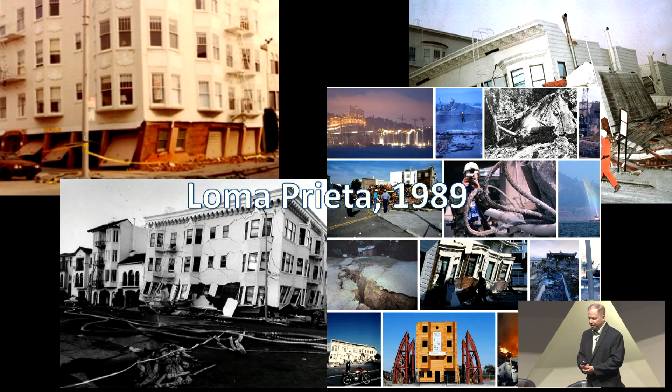So in 1989, while the World Series was underway at Candlestick Park, and many of you remember that if you're over the age of 40 probably, an earthquake struck named for Loma Prieta Peak in the Santa Cruz Mountains where the epicenter was. It collapsed the top level of a freeway, and I think many of us remember that was when cell phones were actually in cars, and people were calling to be rescued from the wreckage. But it also destroyed many, many soft-story wood frame buildings and brought to light that crisis.

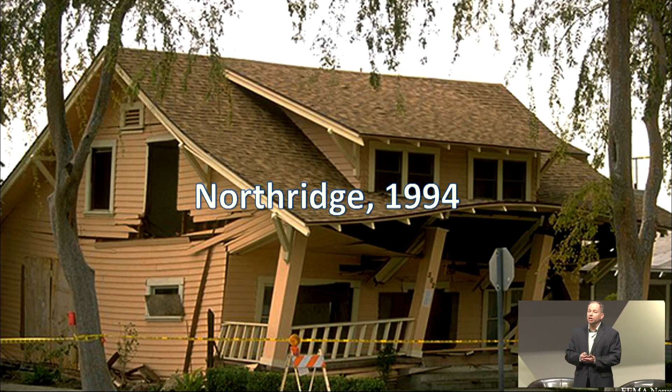5 years later, a blind thrust fault about 450 miles away in Southern California produced the devastating Northridge earthquake with obvious widespread damage. But there was also damage that wasn't quite as evident. And so born were two major research efforts, the SAC Steel Project for steel frame buildings and the CUREE-Caltech wood frame project.

So as a direct result of the Northridge earthquake, the CUREE-Caltech project took a really long and hard and honest look at the deficiencies in wood frame construction in the US. Historically, we thought it performed very well, and it did, relatively speaking, because it's light, and so it doesn't generate a lot of forces. But many, many key recommendations came out of that.

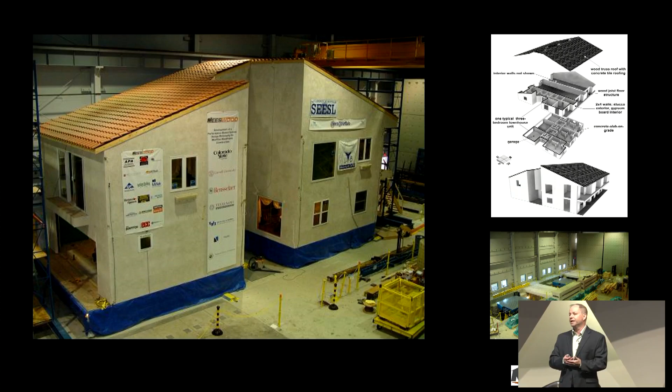So following the smaller groundbreaking tests as part of the CUREE-Caltech project, and some of you were probably part of those, one of the index buildings that was designed as part of that effort was then tested. It was the first major test that used both shake tables at the State University of New York at Buffalo NEES laboratory. That particular test was led by co-PI Andre Filiatrault, who many of you know.

So the E-Defense Laboratory in Miki City, Japan, was built about the same time as the NEES network. It was completed in 2004, and it was the Japanese government's direct response to the Kobe earthquake that occurred almost to the day 1 year after the Northridge earthquake. The Japanese government felt that the level of damage and the number of deaths for a country with such stringent seismic building codes was unacceptable. And so this facility was built.

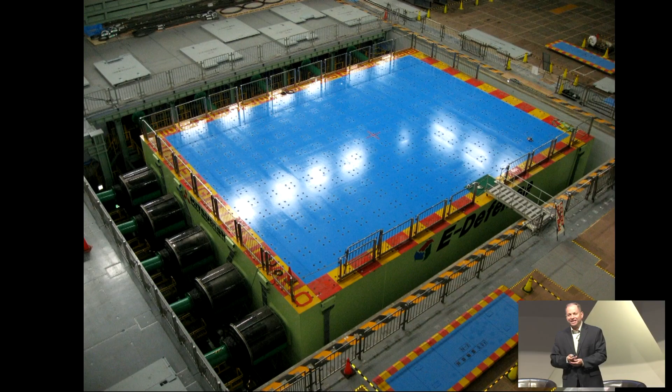It's 10 stories tall with a 6-story door to bring specimens in, provided they're under 6 stories. It's a 15 by 20 meter shake table. So in February 2009, the NEESWood team, funded by the National Science Foundation under the NEES program, operated at E-Defense through a memorandum of understanding between NSF and Japan's MEXT, which is a very long acronym I can't remember, but many of you know it.

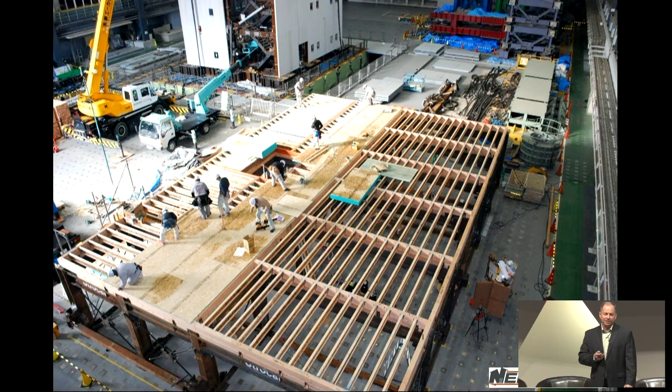And it began construction on what would be the world's largest shake table test, applying information from post-Northridge and from numerous labs around the US, NEES tests as well as others. So the building was designed using a new philosophy. At the time, it was relatively new, and it was definitely new for wood, and that was performance-based seismic design.

But what became notable was that portions of the buildings started to look more like solid wood and not light frame wood construction. And so what you see behind me is a stud pack, and there's one about 6 feet away on the other side of the wall.

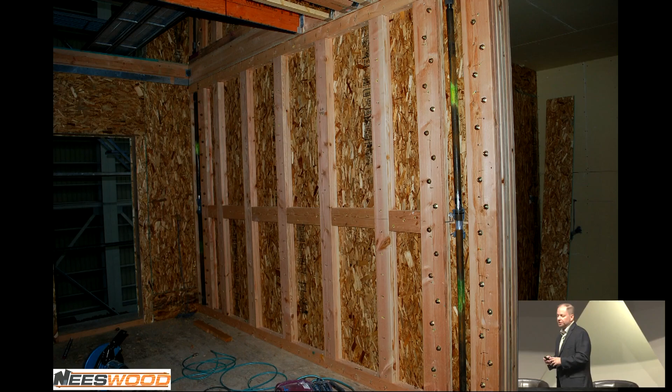There were massive walls to resist earthquake load. This was through a partnership with the Canadian government and Canadian industry in Canada. And several years later, the NSF-funded team used software that was developed as part of this project to perform analysis and work with the Canadian government at their request to increase the allowable wood frame height for the National Building Code of Canada from 4 to 6 stories.

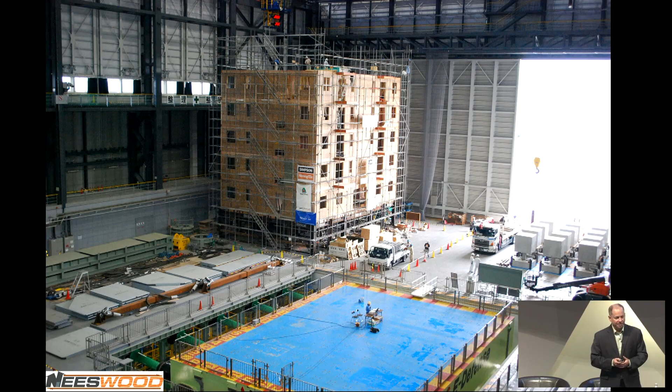And so NSF-funded research through NEES and through the networks directly changed the building codes, as I'll get to in a moment, in the US, but not just the US, but also in other countries. So a team of almost 60 damage inspectors, about half of them from nearby Kobe University, worked rapidly following tests on the 6-story performance-based seismic design building.

From the NSF-funded project, you heard about Elena, but there were multiple academics born through each of these projects, including the project that I'll go through at the end. And many are conducting NSF-funded research right now all around the US as well as in other countries.

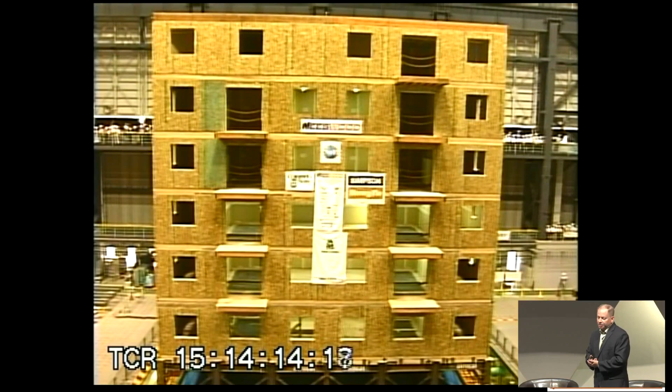So remember, you were drinking your coffee, relaxing, and it looked bad inside. But now let's take a look at the outside of this 6-story building. So this is the same shake that you just experienced. You did have to change your shirt because you spilled your coffee, but there's no doubt about that. And as you'll see from this, the building response is excellent.

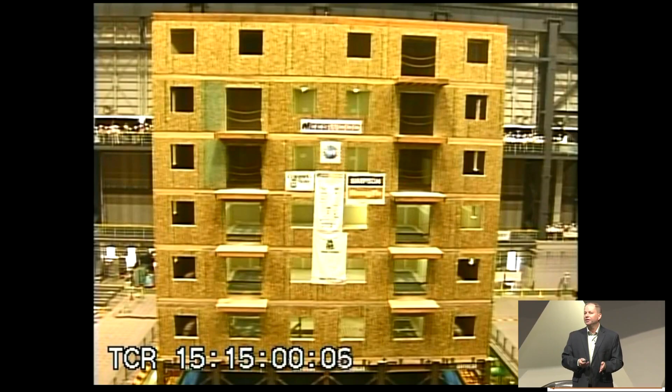There's maybe a second mode in there, but it's designed using direct displacement design. And so what you see here is drifts of only up to a couple of percent at each story, and this was the stronger component. So remember what you just saw, that was a 2,500-year event. You're not supposed to experience that.

So soft-story wood frame buildings around the U.S. and the world, they continued to be a problem. Here behind me you see photos. I think I took one in New Zealand in 2011. There's one from Loma Prieta that's been on the cover of EERI documents, things like that. And this is really what they look like.

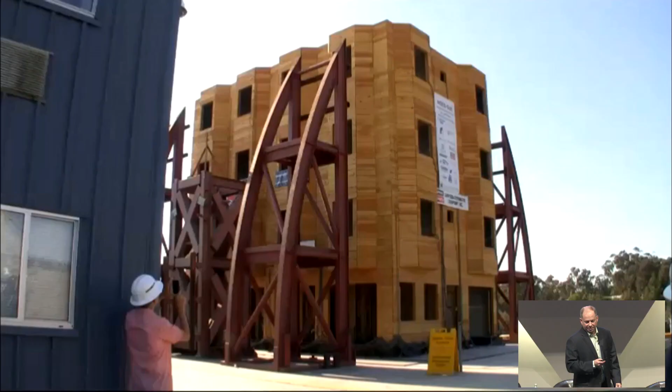So the results of performance-based retrofit approaches were tested over the course of a month or more in San Diego. And the performance was perfect. As you'll see here, you'll see a second mode, and it's a quick shake. It's Loma Prieta. There's only 12 seconds of strong ground motion, but it's a strong event.

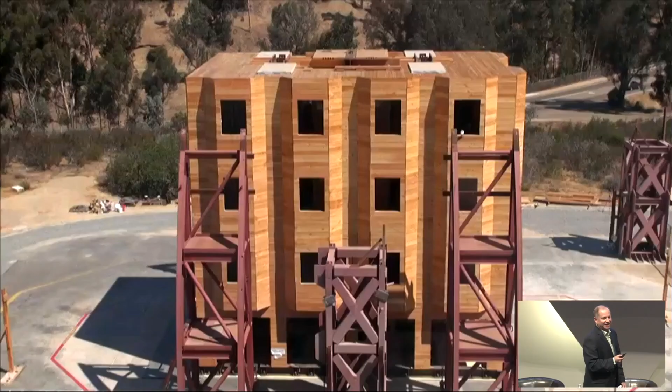And so the NSF-funded student that you saw just stand up in the foreground with the green hard hat, he was pretty excited. That was our first MCE shake. And he is now an assistant professor at Washington State University in his 4th week, and working with us to change building codes for cross-laminated timber, or at least introduce it.

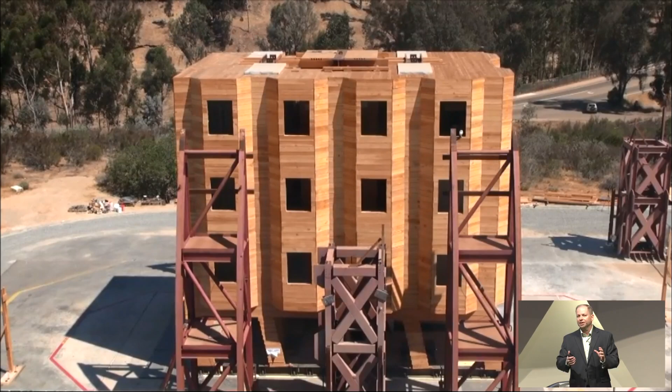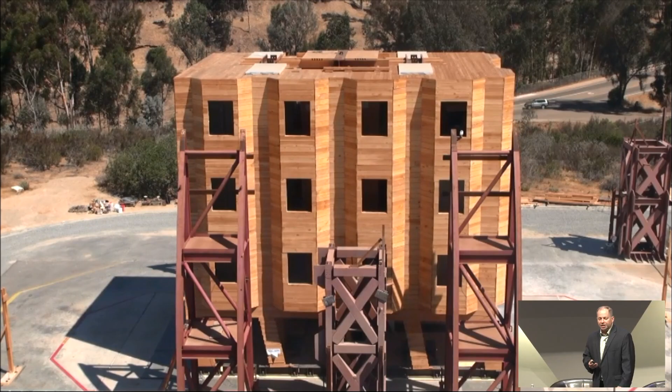And so what you see behind me, this is of course with no retrofit in place, otherwise I wouldn't show you a collapsed building if I retrofitted and it collapsed. And so the results of these tests, and this is another video in the back. You got it? Okay, thanks.

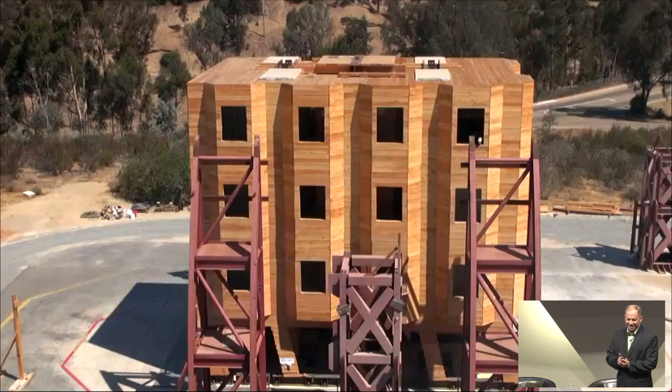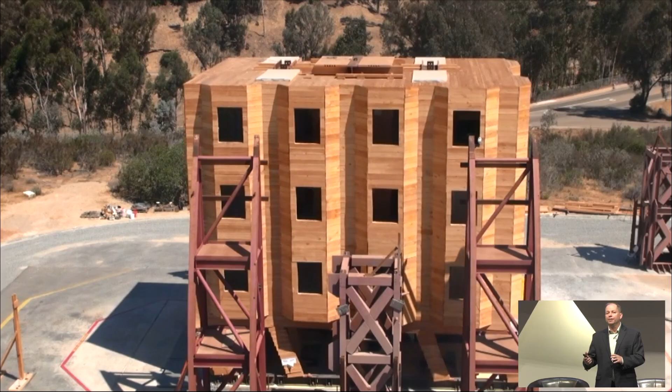And so the results of these provide validation of some of the most advanced numerical models ever developed for wood frame buildings. And those numerical models, they're being used right now in collaboration with the Applied Technology Council, FEMA, NIST, by former students who are professors themselves, and they're working to calibrate codes. And so I know it looks bad, we collapse buildings to learn, that's all.

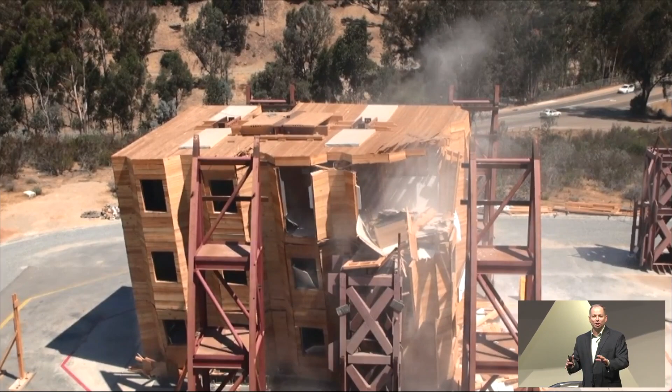So pictured here is the majority of the NEES team. This is the San Diego-based NEES team. Elena was testing at Buffalo, Elena Sutley that you heard about on a test. We actually, because of scheduling, wound up doing 2 full-scale tests simultaneously, one on the East Coast, one on the West Coast. So anyway, I'm a frequent flyer on United now.

So pictured is the NEES team, as I mentioned, industry collaborators, a lot of industry collaborators, as well as faculty, and then just 2 of the students right there are professors at Alabama and, as I mentioned, Washington State. And then 1 professor shown in this that was a co-PI on NEES was a student on NEESWood. So we actually have now 4 generations just from NEES and NHERI as of Washington State just days ago. So we're really excited about that, and to show kind of the power of bringing that forward. And so as I mentioned, this software is allowing us to add new engineered systems to codes.

So now I want to turn your attention to mass timber itself. So mass timber is arguably, and I would argue it, the most sustainable construction material on Earth. One product in particular has led the way, cross-laminated timber. It's fairly widely known as CLT. It originated in Europe in the 1990s. In fact, about 2 months ago, I was in Slovenia, where much of this testing originated, for a conference called Woodrise there that's every few years.

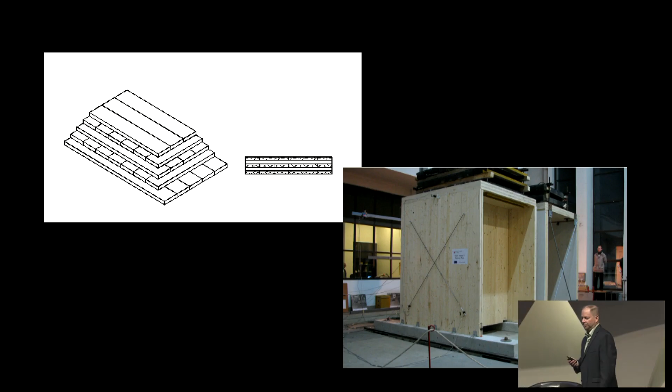And so it worked its way west into Canada first. We worked with the Canadians for a while, and then it moved into the U.S. And now there's plants popping up all over the U.S. And in fact, in NEES, the CLT retrofits that we did that were mentioned by Tracy, we had to import that from Europe just in 2013. And so the material itself has superior fire suppression. It's sustainable. It's very rapid. It goes up. It's really just the behavior is in the connectors.

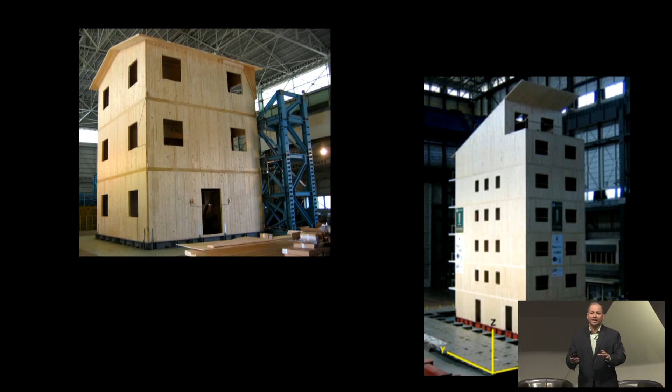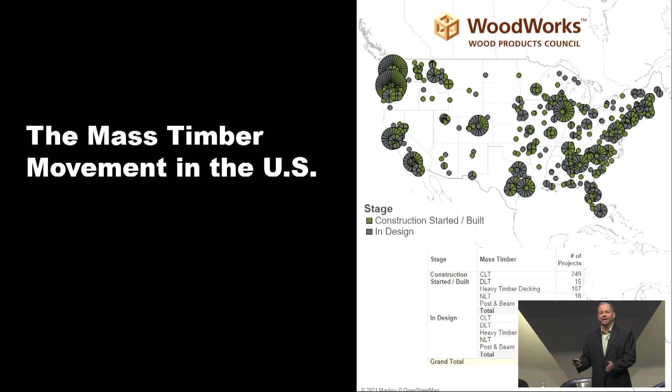So CLT was active through a large project also funded by the Italian government with tests conducted at multiple labs. They tested at E-Defense right before we were there, as well as other labs. It's now moving forward in Japan. In Japan, you're only allowed 3 stories of wood construction due to fire and other concerns. But my math's not that great anymore, but it looks like 5 stories there. And so I think it's really just a matter of time until 5 stories of mass timber construction is allowed in Japan as well. So almost 1,200 major CLT or mass timber projects were underway in 2021 in the U.S. There's 1,500 currently underway right now, and at some point, the goal is to lose count.

So it's hard to know what sparks change or what sparks a revolution really. Sometimes we see that point in time and sometimes we don't, but we know it takes ingredients, and in this case, it's ingredients a couple of decades in the making, with sustained effort by a large group, far, far beyond what I've been part of. But it's a network of people, and it's a network of equipment that enables people to create the conditions necessary to evolve or to have a revolution. So beginning in the late 90s with the CUREE-Caltech project, and then NEESWood, the NEESWood project made possible through the shared use NEES facility, NHERI through the same network.

And so, as I mentioned with the 4 generations, the student becomes the teacher. And so I think that something like this is really only possible through a shared use network like this. And so for all of you out there that are assistant professors and you've not done a project, neither had I when I got NEES-funded. I hadn't done a big project, so go after it. And so many other people over a host of other projects have contributed to this revolution, some through the network, some in their own labs. We like to think we had a little something to do with it, but we know the networks did.

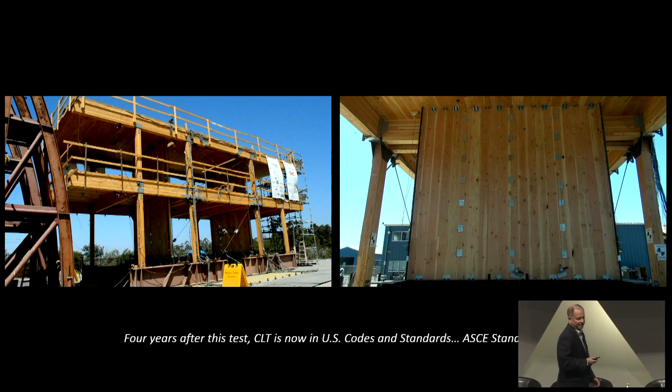And so I just want to show a couple of videos of some recent testing. This is a 2017 project led by Shiling Pei, and this is the NHERI Tallwood project. It doesn't look like a tall structure. It was a test of opportunity at UC San Diego's NHERI facility in 2017, and you can see excellent performance.

This test helped bring cross-laminated timber into U.S. building codes, and so it's now in ASCE 7-22. Still needs some work, but it's there.

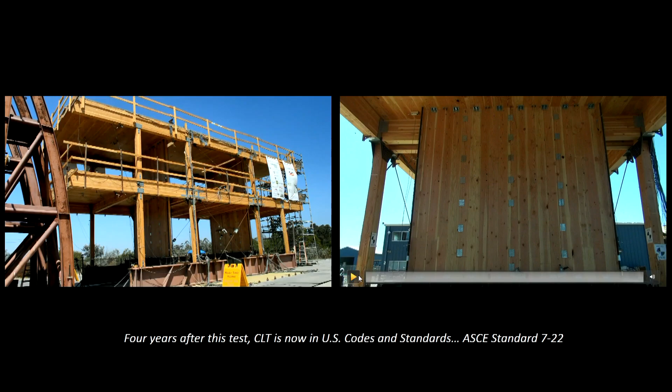And I'll jump to the next. Did I do that? Yeah. You can jump to the next slide if you like. I think my pointers. And then that's a video also.

And so this is the post-tension rocking wall system that was tested also as part of that project. What you'll see here is excellent performance. This building, the idea is resilient mass timber construction. It went through 25 earthquakes, including about 6 or 7 MCE level. Jeff probably remembers how many.

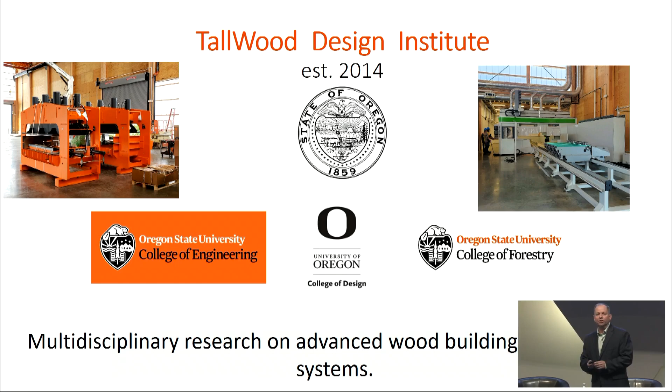You can go ahead and go to the next slide, if you would. Thank you. So the Tallwood Design Institute in the state of Oregon was founded in 2014. And this is just one example of literally tens, if not maybe 100 institutes and centers that are popping up all over the world. And they're in 20, 30 more countries, all through South America. South America typically uses mostly concrete construction. They're starting to build and want to build with mass timber.

So under construction now is a 10-story full-scale mass timber building. It has 4 mass timber post-tension rocking walls, 2 cross-laminated timber in one direction, and 2 mass plywood panels in the other direction. Just a different technology, but it's all mass timber. Tallwood is led by former NSF-funded student Shilang Pei, a professor at Colorado School of Mines, and this will be subjected to more than 20 earthquakes, including at least 5 MCE or 2,500-year events.

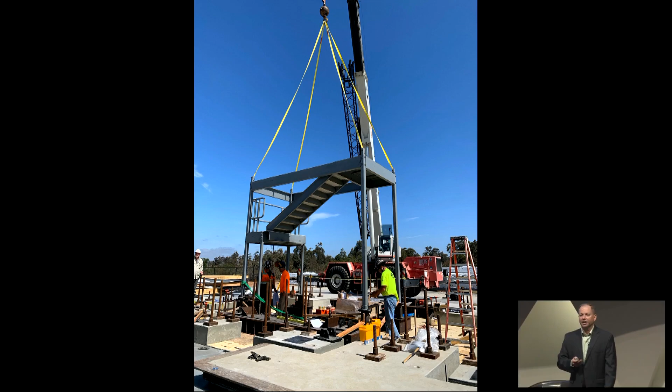And ultimately, the top 4 stories will then be removed, and another NHERI-funded project led by Andre Barbosa from Oregon State University is developing a new converging design philosophy, and they'll apply that, and that includes things like keeping affordable housing as well as other things. And so it's very groundbreaking in the sense of taller wood construction.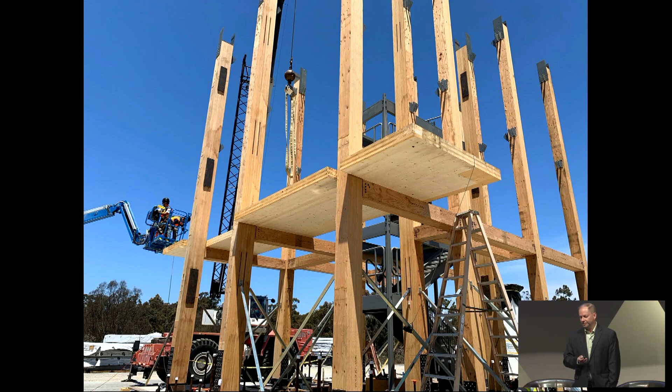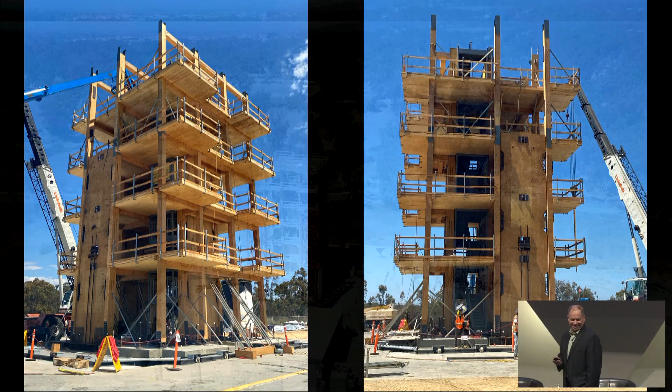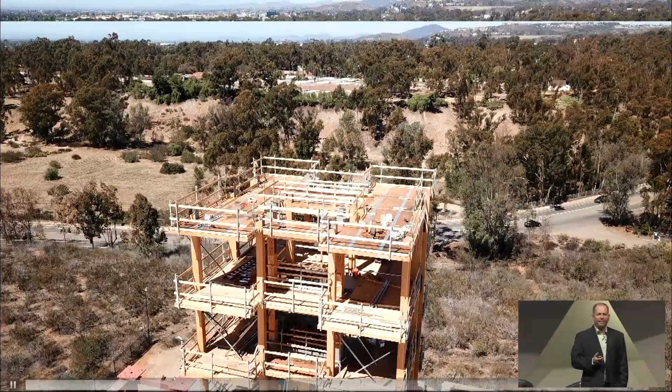And so just some images. This is happening right now. They're probably actually on site trying to do construction right now. And then this is the video, if you could start it about a quarter way through, please. So this is some drone footage from just about 6 days ago, and this is at almost 8 stories.

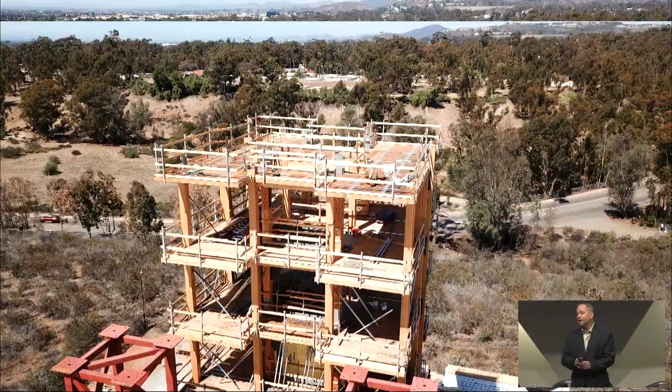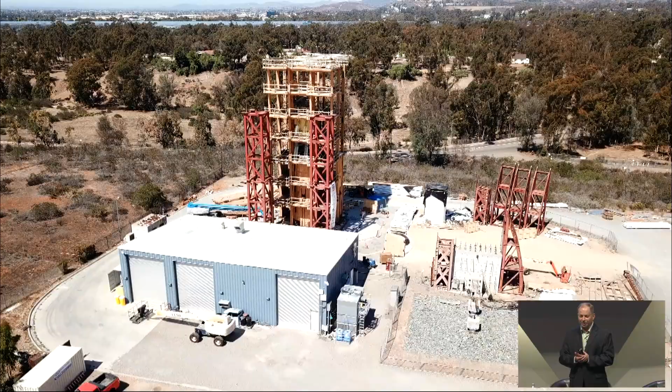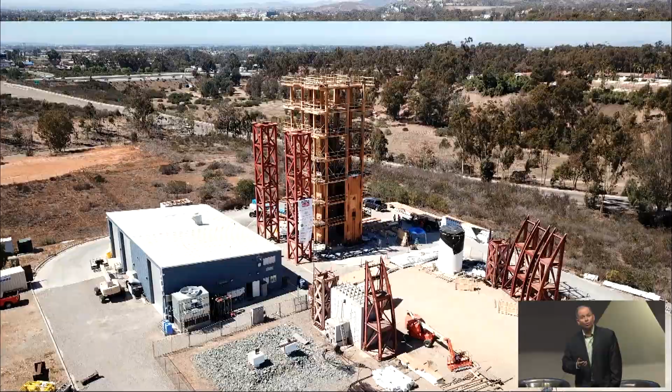Networks are about equipment, and they're about the people that form the teams around them. And so on behalf of the entire TallWood team, and I think Jeff Berman is one of the co-PIs with me as well, so I just want to acknowledge him. But on behalf of the entire TallWood team, you're all invited to the world's tallest shake table test at 112 feet into the air in the beginning of 2023. And it represents the future of sustainable and resilient construction.

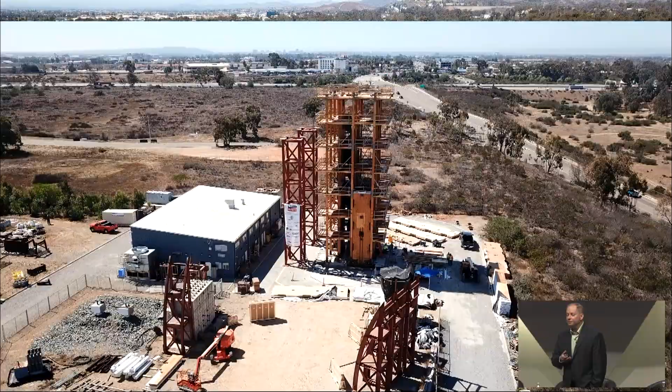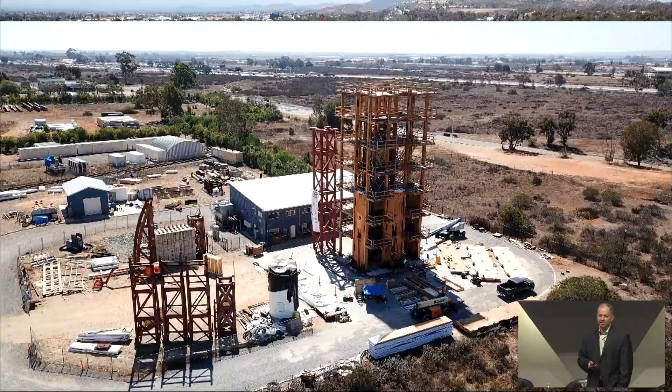And we can probably jump to the next slide. There's a massive timer up here, just so you guys know. So, it's right there.

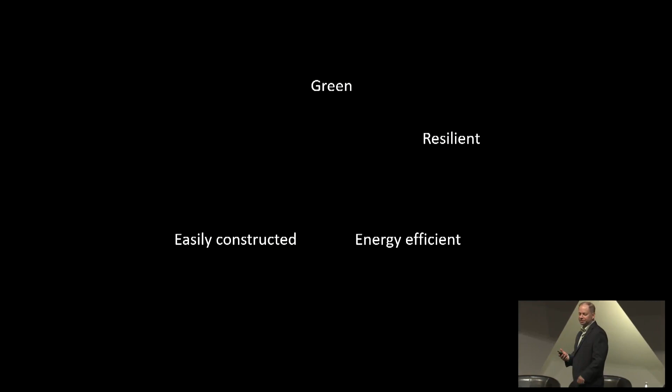And so, mass timber is green, it's resilient, it's energy efficient, it's easily and rapidly constructed, but most importantly, it's sustainable. And so, coming over the next decade, I don't know what we're calling it, Dan, you threw something out there yesterday, but coming in 2026 to 2035, it'll be multi-hazard designs, sustainable and climate adaptive designs, and then not just tall, but true high-rise mass timber buildings.